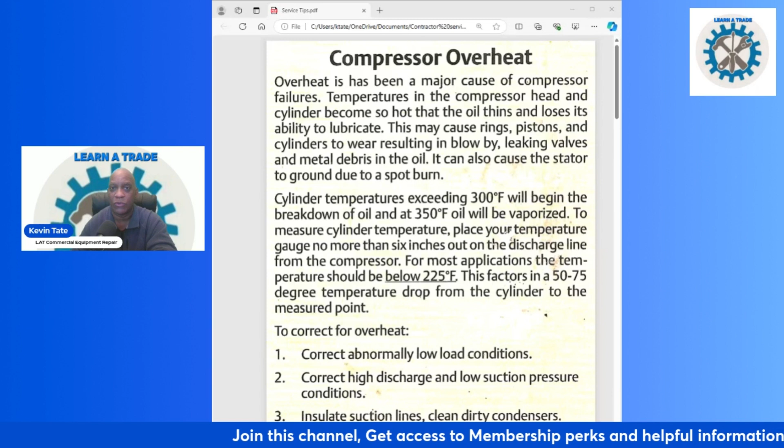To measure cylinder temperature, place your temperature gauge no more than 6 inches out on the discharge line from the compressor. For most applications, the temperature should be below 225 degrees Fahrenheit. This factors in a 50 to 75-degree temperature drop from the cylinder to the measured point.

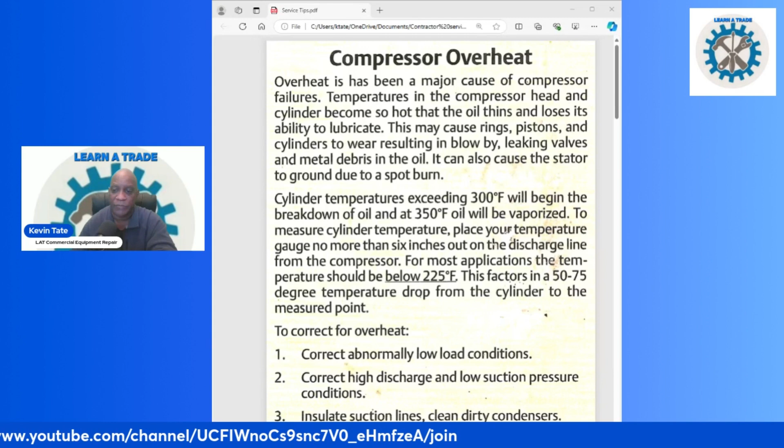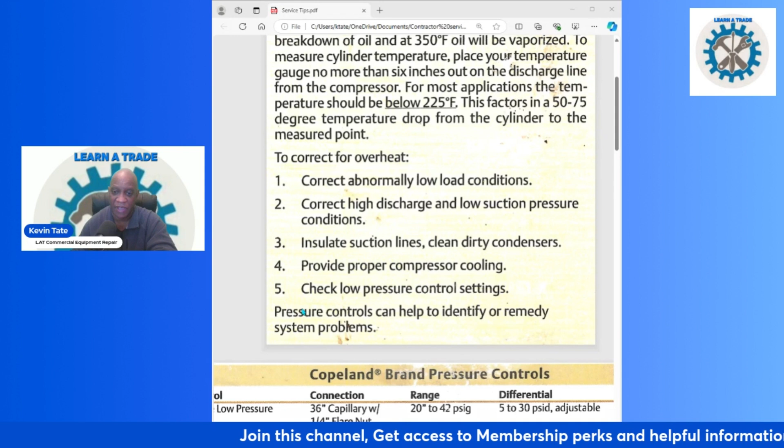To correct an overheat issue, I have 5 suggestions. Number one, correct abnormal low load conditions. Number two, correct high discharge and low suction pressure conditions. Number three, insulate suction lines and clean dirty condensers. Number four, provide proper compressor cooling. Number five, check low pressure control settings. Pressure controls can help to identify or remedy system problems.

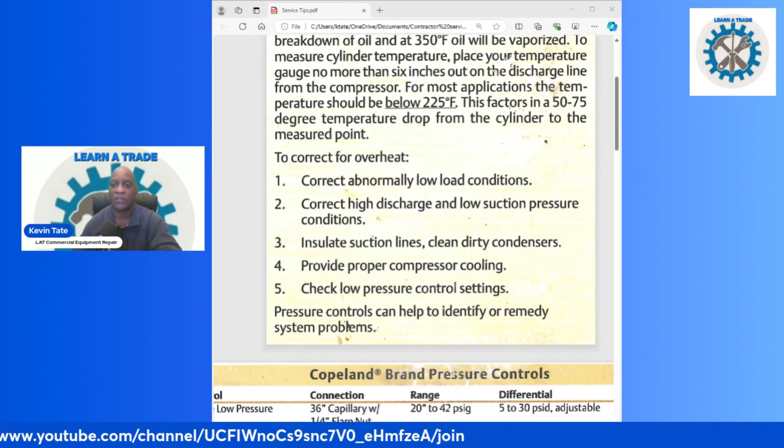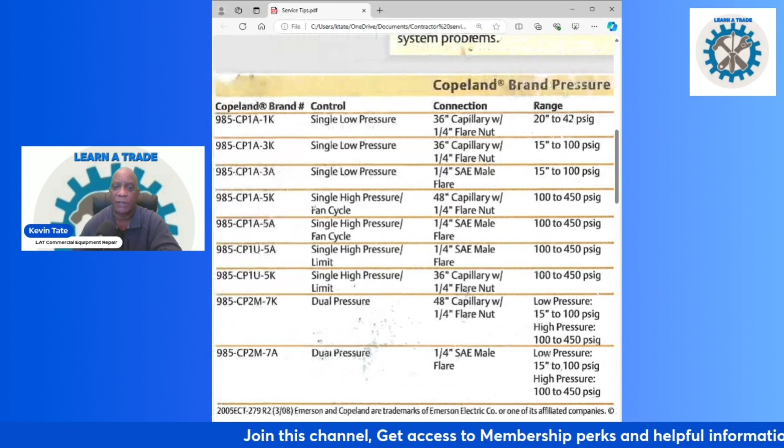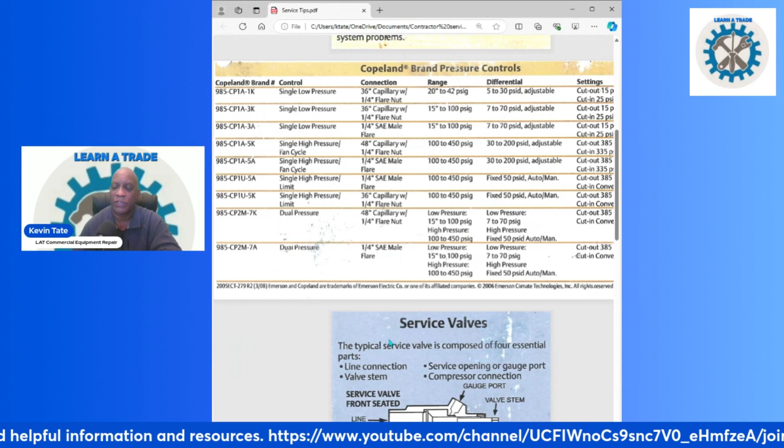So what I included in this broadcast is a chart. It's from Copeland. Let's see if I can give you a good look at it here. Give me a second. Let me bring it down a little. Okay, hopefully you can make that out. If not, you can pull up this video and screenshot it, or you could even email me and I can send you this chart with the pressure controls.

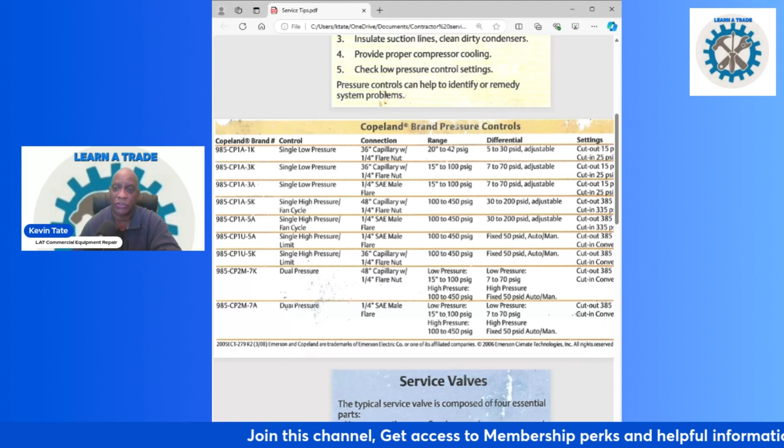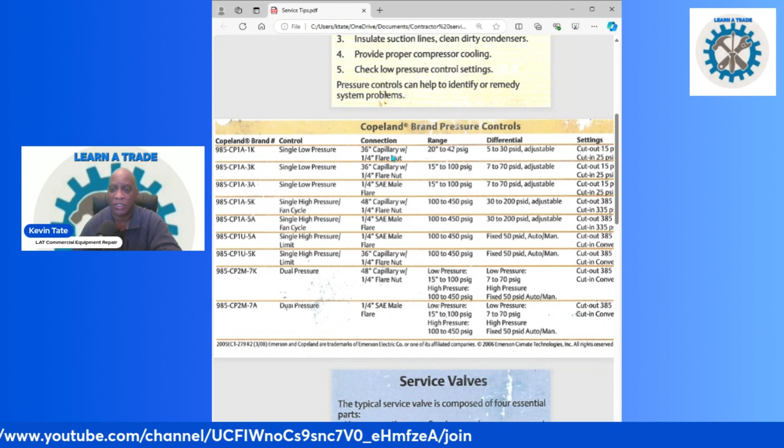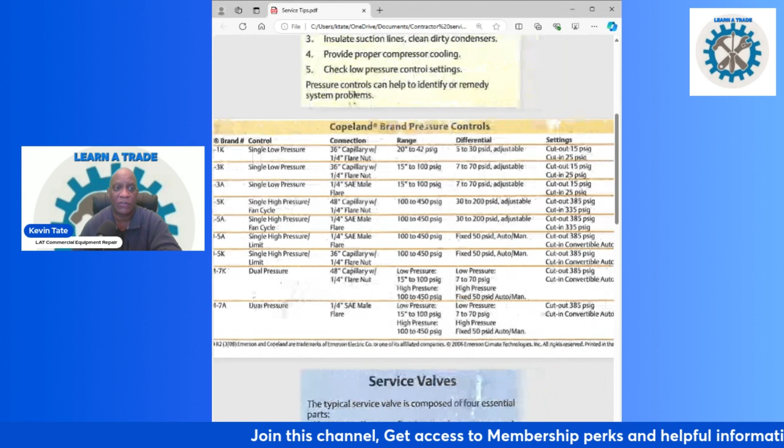This chart is by Copeland, and it gives you the pressure control part number, the connection, the range, the differential, and the settings for your cutout and cut in settings. So it gives you all the information on those pressure controls. These are Copeland brand pressure controls, and this is a list of all of those pressure controls: your single low pressures, your single high pressure fan cycle controls.

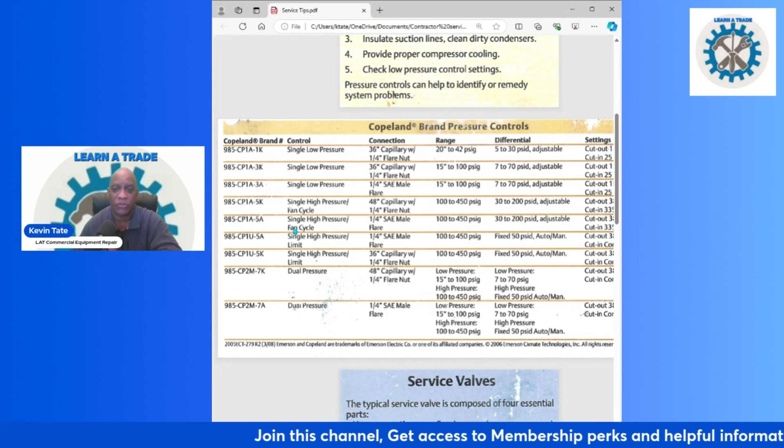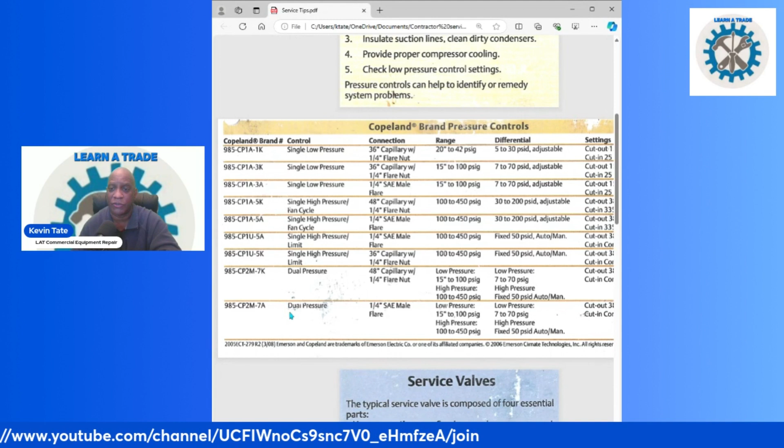You have your single high pressure fan cycle controllers, your single high pressure limit - it has two of each - and your dual pressure controls also available. It has the part number that you would need to order, and then it gives you all the specs: the connection, range, differential, and the settings for your cut in and cut out, so you'll know what settings to make.

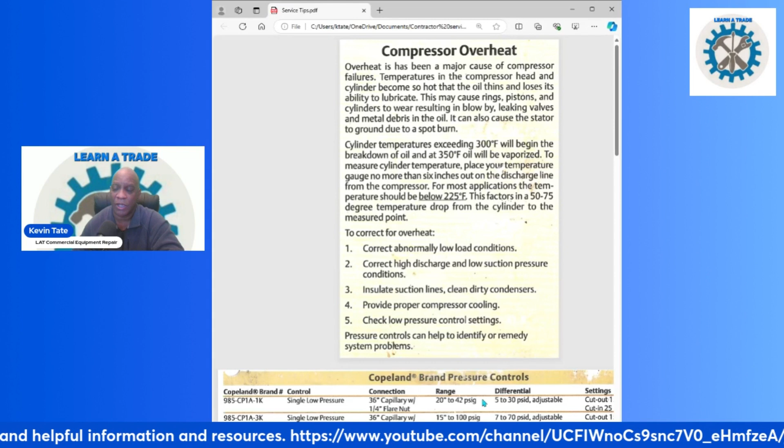But you can also get them through Copeland too. So what I will probably do is also include a link for Copeland Tech support, because it's very important that you communicate with your tech support with these manufacturers. That's something I would like to stress more and more as this channel grows - build your relationship with these manufacturers, because they're your link to understanding this equipment, and they're your link to getting the training that you need on their equipment.

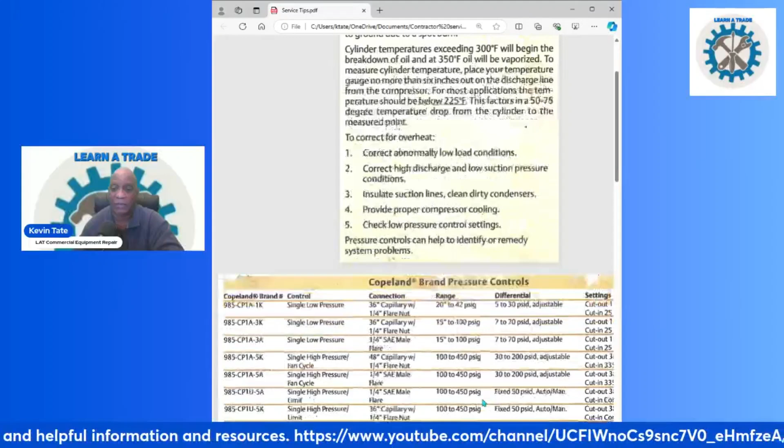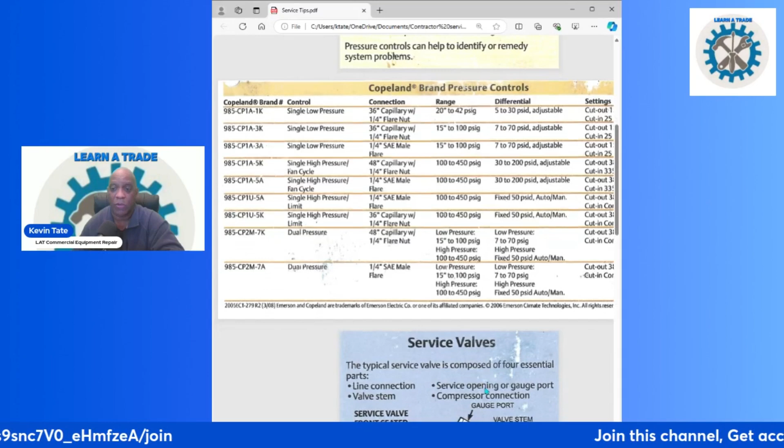So they're definitely the ones you want to reach out to, but I will see if I can provide that link for you for Copeland Tech support, and then you would be able to reach out to them directly and talk to them about further training, and talk to them about these pressure controls and how you should go about setting them. Okay, so this is just a service tech tip, I hope it helps.